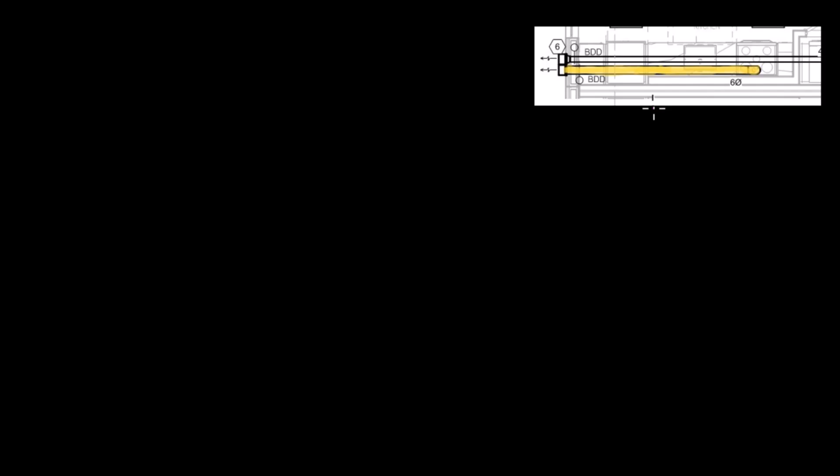Usually what I have encountered is like in mixed use buildings, residential buildings, or just single homes, there is always a kitchen. So anytime there's a kitchen, you need a range hood, so you need to install an exhaust duct. I'm going to put this in pink. So what you're seeing here is my exhaust duct right here, and this is the kitchen, the range hood, the stove top, the range.

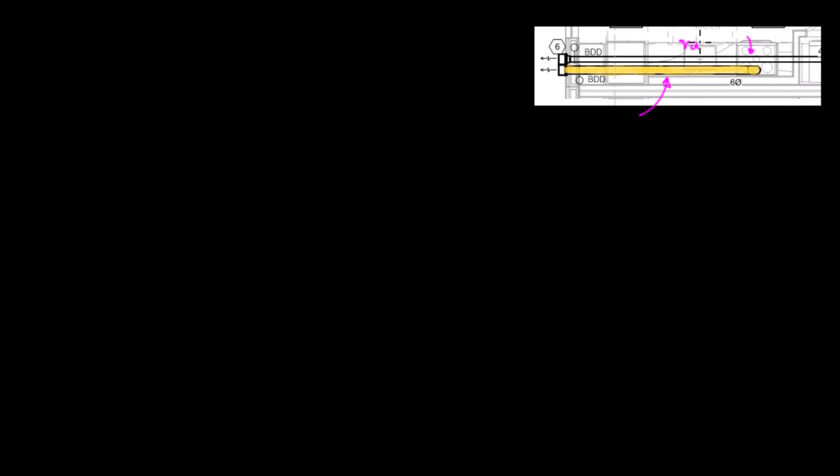Usually what you have to do, and you have to coordinate with the architect, is where you are going to have the outlet. This is the termination, and it has to exhaust to the outside. Usually the architect combines exhaust outlets because they don't want to have too many penetrations, too many holes. It's better to have it right in a good location. For example, this one is for the dryer - that's going to be for another video.

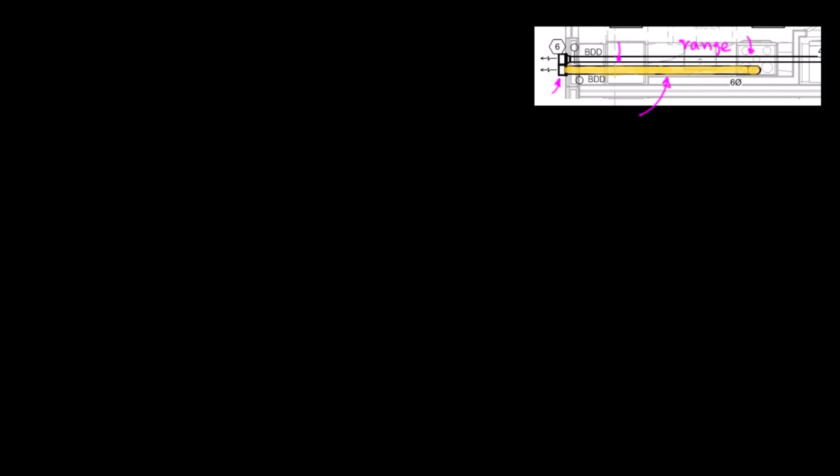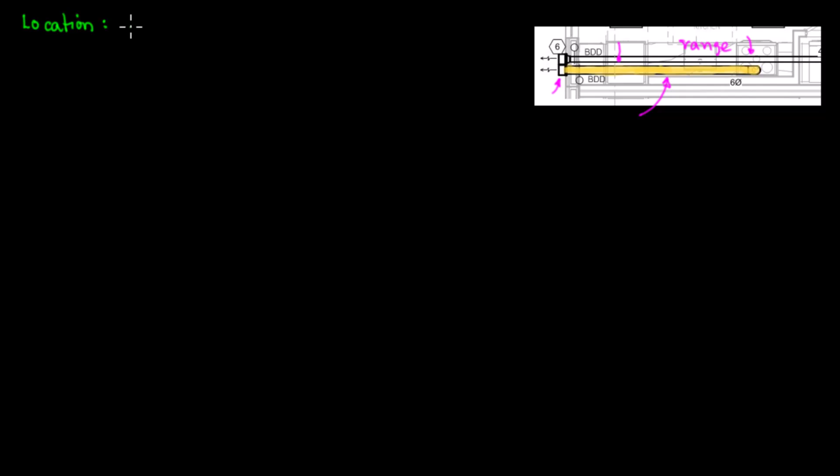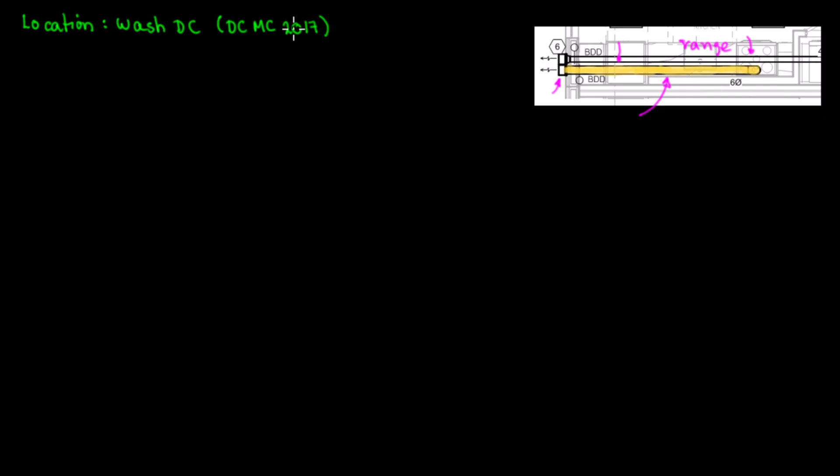Now what we're going to do is, again, we need to check on location. So what we're going to put in here is location. As we were mentioning in the other video, the location is going to be Washington, D.C. This is based on the D.C. Mechanical Code 2017. Today is 2024, so as of now the code is 2017, which is pretty much based on IMC 2015, the International Mechanical Code.

As I was mentioning in the previous video, you have two options: either go to Upcodes, or you can always double check in the ICC digital codes online. Since in the previous video we checked on the ICC digital codes online, now we can double check on Upcodes. We can resort to that.

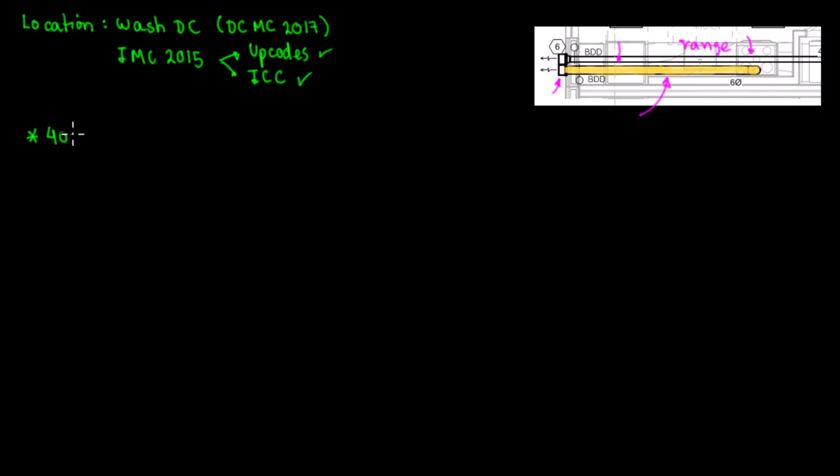So what we're going to do is start with the first one. I'm going to put my first code for kitchen exhaust, and that's going to be section 403.3.2.3. That's going to be the local exhaust. So for the local exhaust, what is the code requesting to do? Let's check on that.

We're going to use Google here, and under Google we're going to check Upcodes. So what we're going to do is search Upcodes, IMC 2015, and then 403.3.2.3. There we go - it says chapter ventilation number 4.

So this is Upcodes, and this is for Connecticut. Actually on Upcodes we should put Washington, D.C. Okay, Washington State - no problem. So in this case, this IMC is the one that is making some trouble. Upcodes 403, Washington, D.C., chapter ventilation - there we go. It says D.C. Mechanical Code 2017. So our first code is going to be on section 403.

Section 403 says mechanical ventilation. If we click in here, we go to number 3, which says outdoor and local exhaust airflow rates, like we did in the previous video with the bathroom. So now we go here and check on section number 3. Let's go checking here - where's the table? There we go, we have a table.

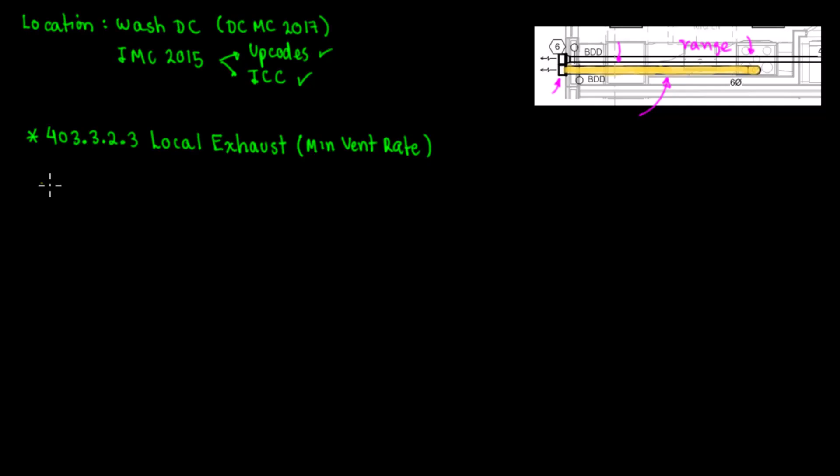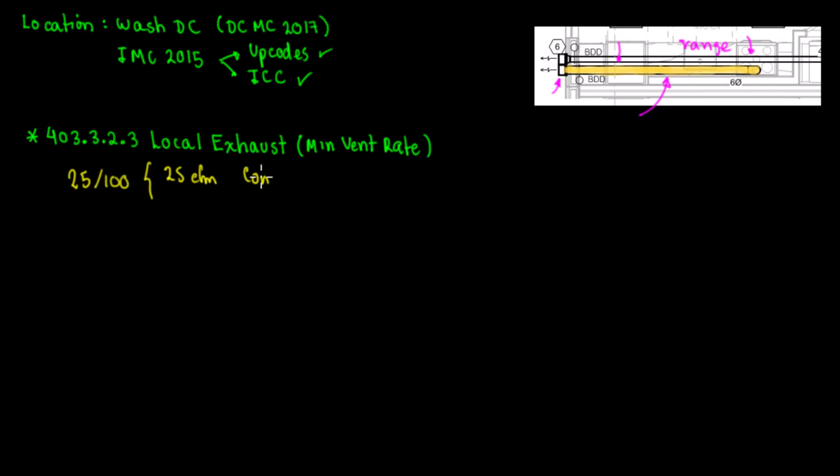So this is 25 and 100. There we go. So this is gonna be 25 and 100 CFM. This is gonna be 25 CFM, which is continuous, and then we're going to have 100 CFM, which is intermittent. Okay, perfect, excellent. So now we have the minimum ventilation rate.

Now what we need to do is check what type of hood we're gonna have in here. Usually what we do is we have a type 1 hood. So let's double check on what a type 1 hood is. So for that, I'm gonna go here to another code section, which I'm gonna put in parentheses.

And why am I making these videos? Because sometimes when you're doing a design, you need a resource to go check quickly on codes, but you're not going to be reading, right? So this is like a summary. At the end of the video, this is going to be all completed, and you can always check on the video or take a screenshot. The code section is this, the code section is that. So it's also helpful for me too.

Okay, so now let's go check on this section. This is going to be section type of hood, 507.2. Let's go check on that code. That section is going to be in here, 507. Chapter 5 is exhaust systems. Number 7 is commercial kitchen hoods. In this case, we're not talking about commercial, we're talking about residential and domestic. So those are two different things.

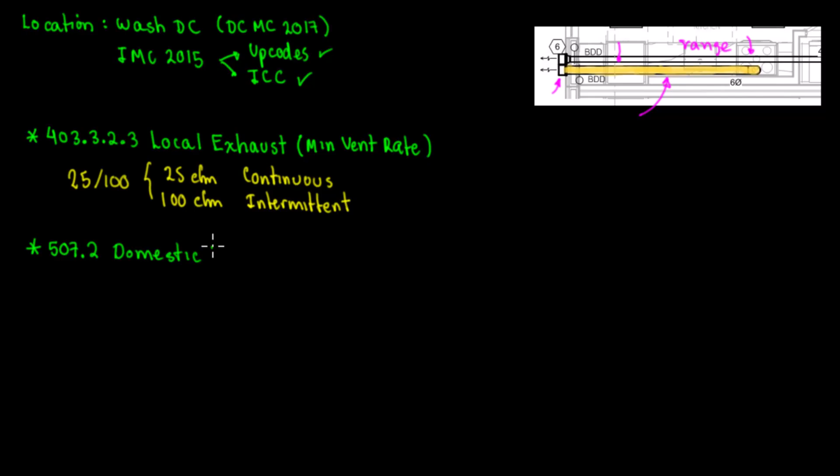So I'm going to put in here, this is going to be domestic kitchen hood. The chapter or the section is about commercial, but we're talking about a domestic kitchen hood. We need to check on this just to have a deeper definition. So this is going to be 507. We go to section commercial kitchen hoods, and once we go there, 507, we're going to go inside.

We have general, we have type 1 hoods, type 2 hoods. So we're going to go to type 1 hoods. And what is a type 1 hood? So this is going to be 507.2, type 1 hoods. We're going to put that in here: type 1 hood. This is just for our reference, okay? So what's a type 1 hood?

This is going to be installed for cooking appliances that produce grease, right? So if you're cooking eggs or anything fried, of course that's going to produce grease because you have your oil, olive oil. So this applies to that type of hood. And also smoke, of course you're going to create smoke as a result of the cooking process. So that's the definition. There are 3 types: medium duty, heavy duty, and extra heavy duty.

There's also a diagram in here, but there's an exception: electric cooking. A type 1 hood shall not be required for electric cooking. And honestly, in Washington DC, there's an electrification process. They are going green. For new construction buildings, they only want electric. They only use gas for the emergency generator because it has to be a different type of fuel, right? So most of them are going electric.

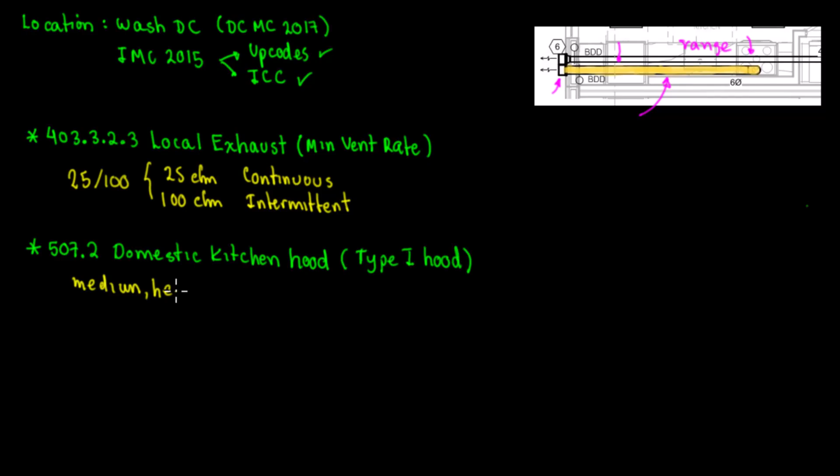We have medium. We can put medium, heavy, and then we can put extra heavy duty. All right, so actually we also have light duty too. Okay, so what I'm going to do in here is delete this. Okay, so I'm going to add in here light duty too. Heavy and light duty. Okay, so that's the code.

Okay, for domestic kitchen hood, type 1 hood, we have that. However, for the types of hoods, we need to check on this other section. I want to go little by little because I don't want to confuse anyone. So for the type of hoods, we go to the International Mechanical Code. I'm just double checking very quick. It's called capacity of hoods. So we're going to put in here 507.5, and this is called capacity

of hoods. So basically what happens in here is we need to know, from this medium, heavy, extra heavy, the CFM per linear foot of a hood, canopy hood, or the type of hood. So let's go check the capacity of hoods in the code section. We were here, type 1 hoods, right? Now we have type 2 hoods, hood size and locations, but now we're going to check on capacity of hoods.

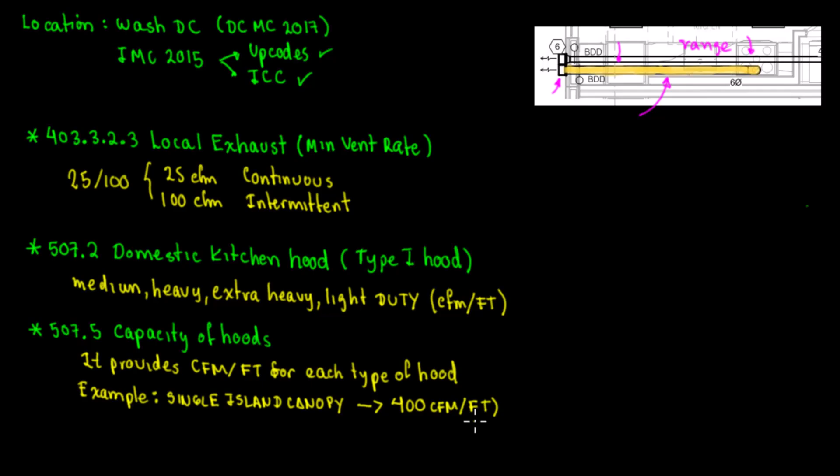So for a single island canopy, we need 400 CFM per linear foot. Okay, but that also depends on, I'm gonna put this as white, what type of application. This is gonna be, for example, for light duty cooking. Okay, that's the example of the capacity hood.

Okay, but now let's go check if we need makeup air or we don't need makeup air. So in that case, we're gonna go here to the next code section. We're gonna put it on this side. So that's gonna be 505.2, and that's going to be makeup air required.

And this is actually very important because one time I went to a resort in Mexico, Cancun. The commercial kitchen had all exhaust, so they are complying with that, but there's no makeup air. So when we were trying to get inside the commercial kitchen, we had to pull the door, but there was such a big vacuum we had to put extra force to open the door, because there's no makeup air. So that's why makeup air is required.

So let's go back to the code section and check 505.2. 505, domestic kitchen exhaust equipment, and here, makeup air required. It says exhaust hood systems capable of exhausting in excess of 400 CFM. Where are you going to get that number? You get that from the cut sheet, from the specs that you are gonna install in your construction project. So you need the maximum airflow, maximum CFM. If you have more than 400 CFM, it shall be provided with makeup air at a rate equal to the exhaust air rate.

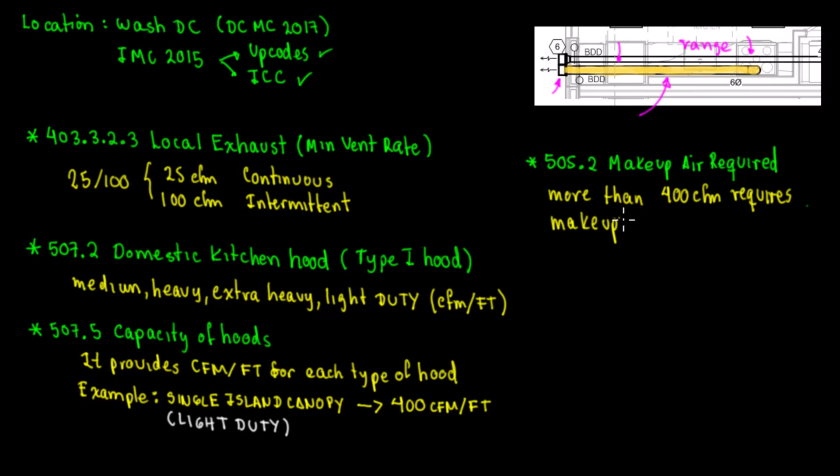So what I'm gonna put in here in my summary, I'm gonna put this in yellow: more than 400 CFM requires makeup air. But you're going to get this from the cut sheets. So now let's go check on the cut sheets. Where am I going to find that? Let's go check on General Electric.

So if you go to General Electric domestic range hoods, we're going to be able to see the CFM. That's what we need to check. Let's go check on one of the hoods. For example, this is 30 inches, 36 inches. Let's check on this one, under the cabinet hood: General Electric 30 inches, $390. Let's click in here. I need the CFM, so let's go see the CFM.

This is how it looks. If we go to specs and details, it says accessories, appearance, venting, features, CFMs and sound ratings. The sound rating is related to how quiet it is. Now CFM, the maximum is 310, and it actually has 4 speeds: boost, high, medium, low. Fan speed control, you have 4 speeds. So the maximum is 310, so you don't need makeup air.

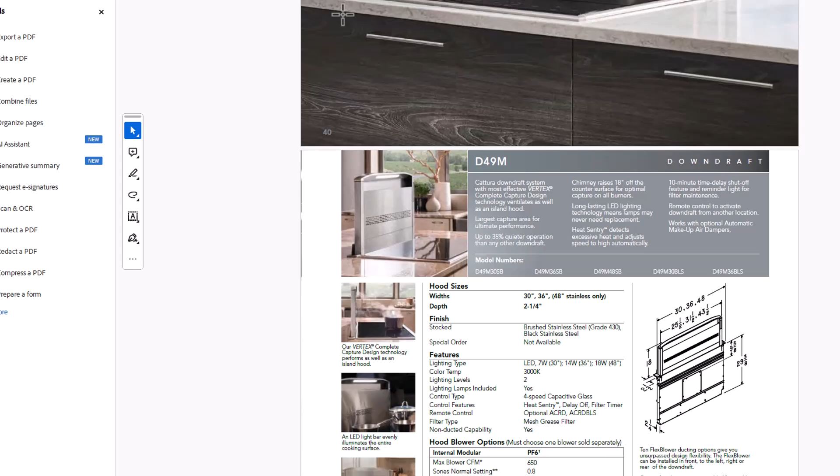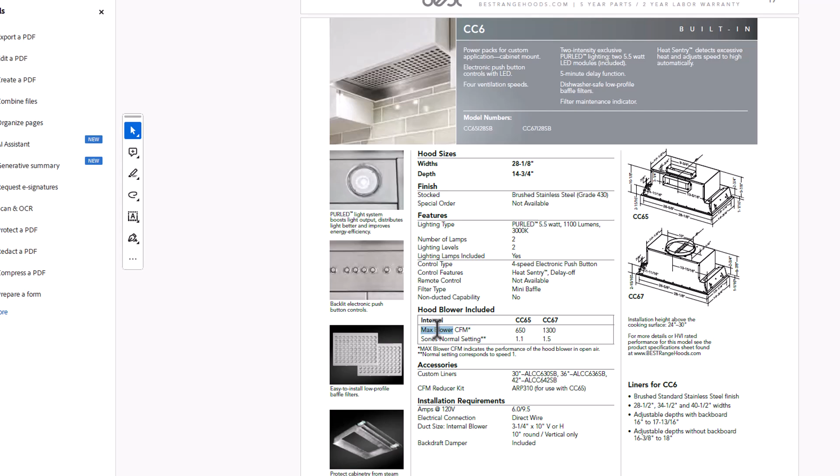All right, so for example, I have another example. I have some cut sheets. Sometimes you ask this to the architect. There's another brand here, see, range hoods. So you can always download this online. So you're gonna be able to see in this catalog a lot of information, but I'm interested mostly in the CFM. So for example, you have a range hood in here, and it says maximum blower CFM, you have 650, so you're gonna need makeup air.

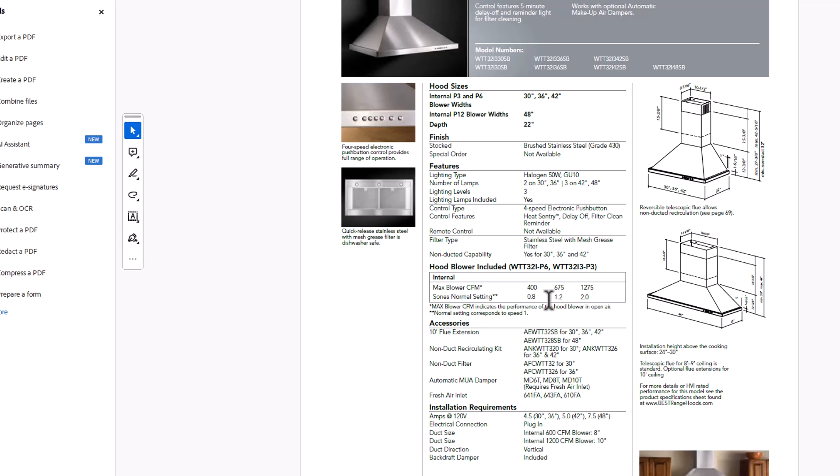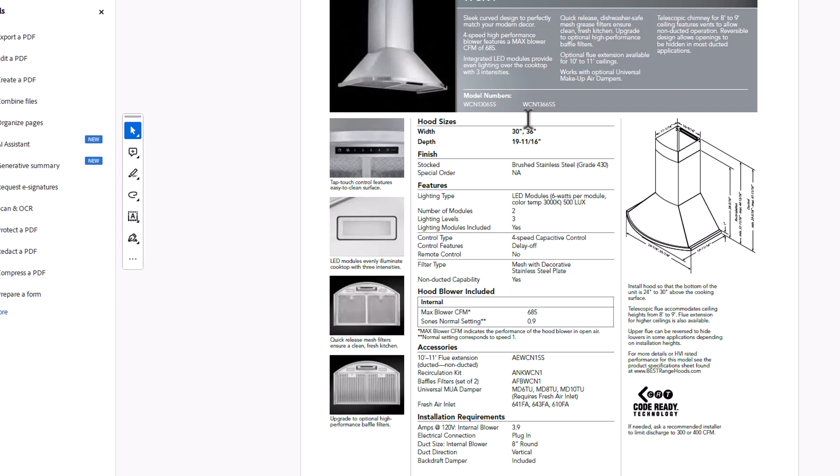And now another part of the code, because this is actually very long, you need to comply with the outlet terminations. And that's going to be the last part of the video. So we're going to put in here as a summary the section. That's going to be section 506.3.13. The title is going to be exhaust outlets. And of course, this is going to be for type 1 hoods. So we're going to go check on that in the mechanical code.

So we're doing right now Upcodes. So what do we have in here? There we go. We have duct serving type 1 hoods, and we're going to have under 13. So this is going to give you the distances where you have to locate your outlet, because that's also very important. You cannot have your exhaust outlet near an air intake. For example, if you have an outside air intake and an outside exhaust outlet, they have to be separated at least 10 feet. So if you read on this in deeper detail, you're going to be able to find everything. So in here it says exhaust outlets serving type 1 hoods.